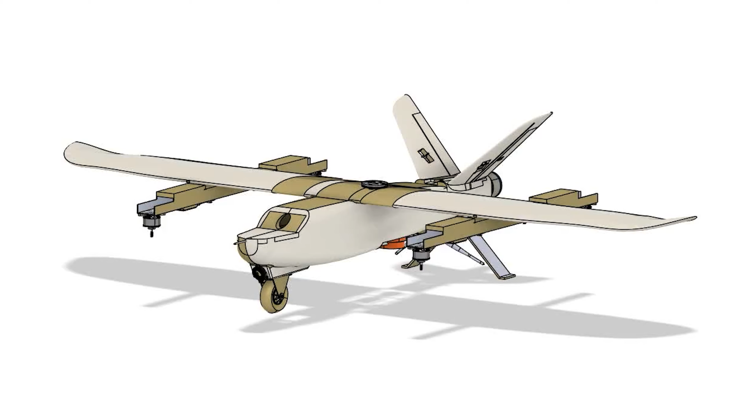The Fergani UAV is fully autonomous and has 5 motors, 4 vertical and 1 horizontal. It can perform vertical landing, takeoff, and area scanning maneuvers with its 4 vertical motors and uses its tail motor for navigation. The Talon model of the XUAV brand was used as the base of the fuselage, and modifications were made depending on the mission requirements.

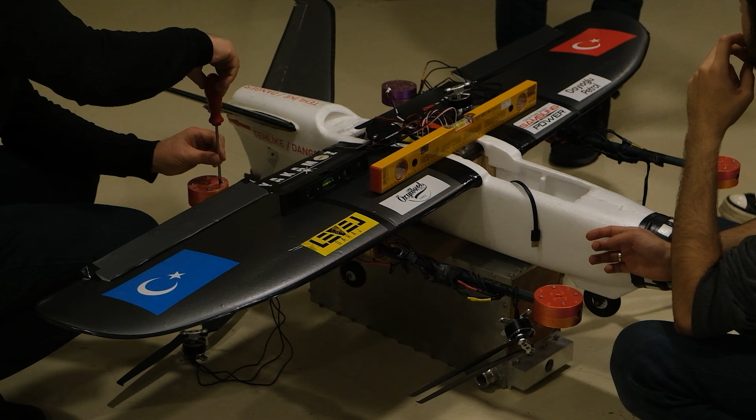Fergani, which has an average battery life of 40 minutes and a communication range of 40 kilometers, is designed to carry its payload and autonomously recognize a target, then drop its payload when it reaches the drop point. It has a 6.3 feet wingspan and a fuselage length of 3.6 feet, and it is designed for long-distance gliding.

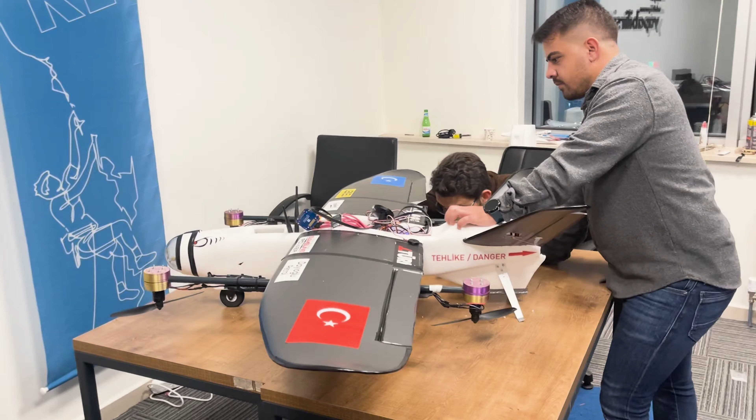The avionics systems of the Fergani UAV is designed to be compact and modular. All actuators, sensors, and control components are connected in such a way that they can be easily removed and installed, and can be quickly replaced if necessary.

A 6-cell, 22.2 volts lithium polymer battery with 22,000 mAh load capacity was chosen for the completion of the mission and to provide long flight time.

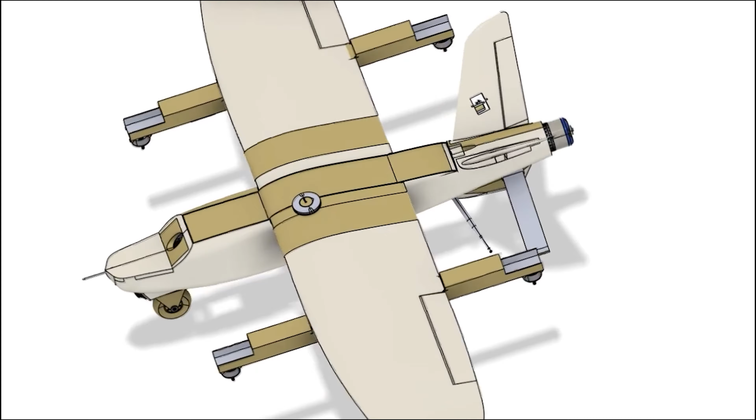SUAS V4014 motors, which are highly efficient and will provide the required thrust, were used as vertical landing and takeoff and drone mount motors, and Skywalker 80 amp was selected for the ESCs that will feed the motors.

SUAS X4130 was chosen as the tail engine for its high thrust, and Flycolor's 150 amp was chosen as the ESC. An emergency power cutoff switch is included on the top of the housing to be able to manually cut off the power if an emergency arises.

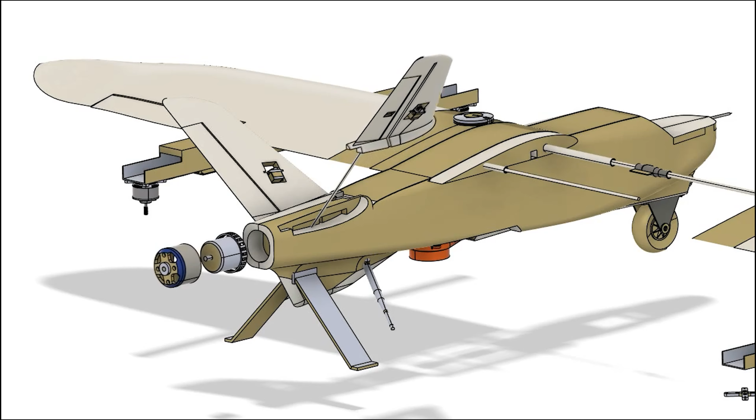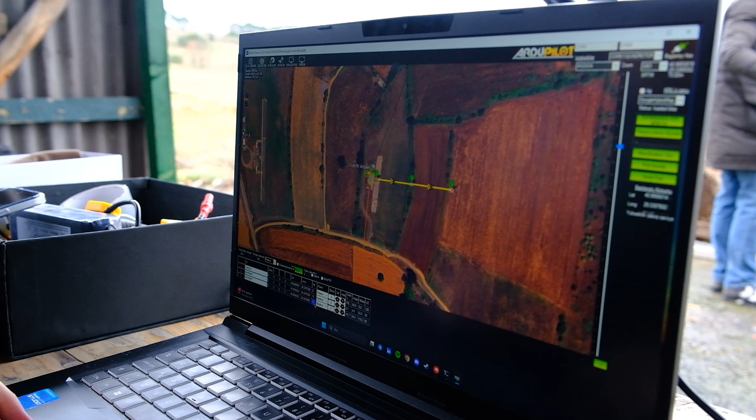The ground control station uses telemetry and Wi-Fi for communication units. The necessary mission commands will be sent to the aircraft through the ground control station with the interface software and connected communication systems. The aircraft's position, location, altitude, airspeed, and the shapes it sees are designed to be displayed on the ground control station screens.

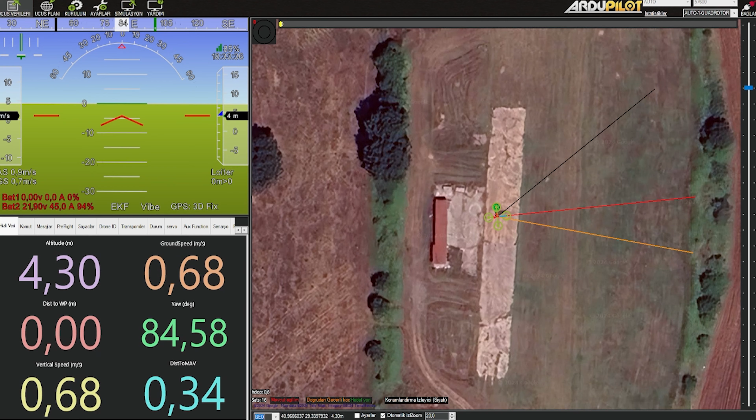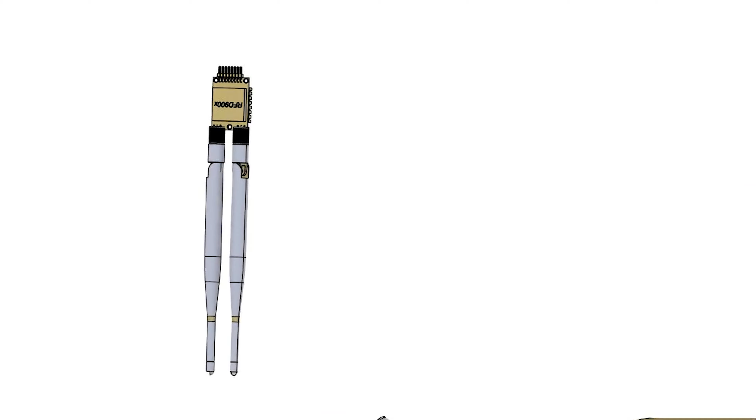Between the aircraft and the ground control station, a two-way connection must be established. This connection starts with the transfer of telemetry data and camera images produced by the aircraft to the ground control station. At the same time, the necessary commands from the ground control station to the aircraft are transmitted through this connection. The aircraft communicates with the ground control station via 3 different frequencies, in 3 different wireless ways.

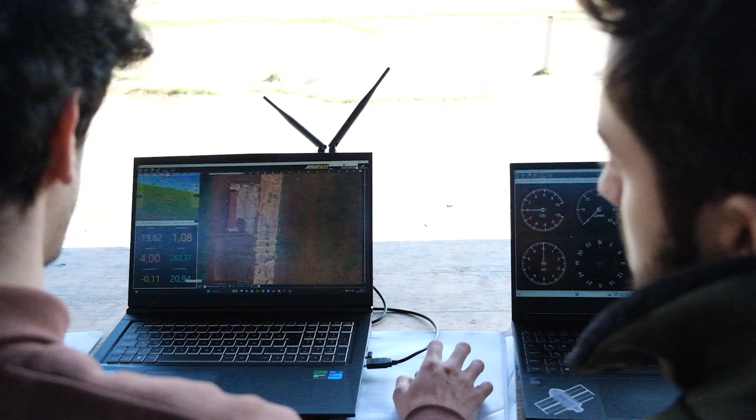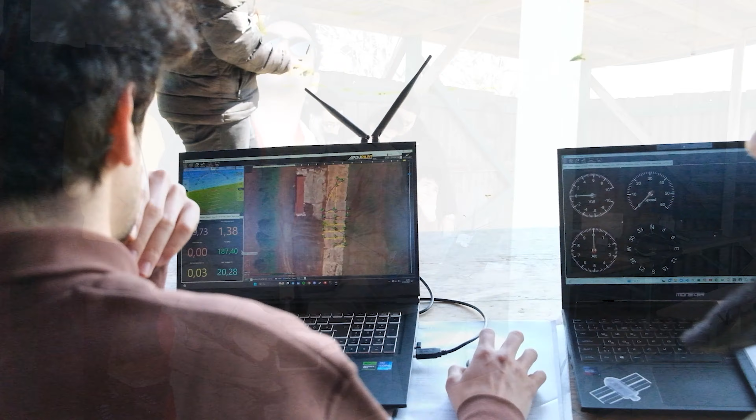The 5.8 GHz band is used for image communication and transmission. The RF 868 MHz band is used for the transmission of telemetric data, and the 2.4 GHz band is used for the safety pilot to take control of the system in case of emergency.

Within the scope of the autonomous flight mission we undertook in the competition, the Fergani VTOL UAV will take off from the runway in rotary wing mode, and after reaching the required stall speed, it will move in fixed wing mode to the area where the payloads will be dropped. After reaching the region, it will switch to drone mode, and the region will be scanned sequentially.

In line with the tests carried out, improvements made in the software were aimed to keep the aircraft in the air in the most appropriate way.

Fergani UAV is designed to carry 5 8-ounce water bottles and will release its cargo with a parachute. The release mechanism is designed as a rotary system, and only the parachute is attached to the water bottles that fit into their slots without any other mechanical parts. In this way, opening the water bottle release with the parachute is as easy as turning the lid.

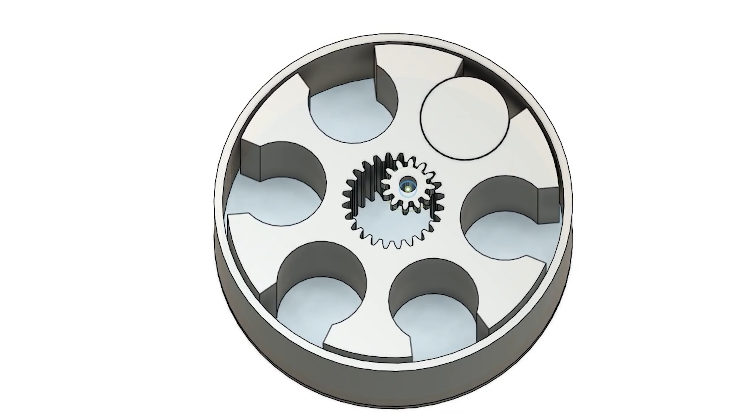For the release mechanism, the water bottles, which are placed in a round slot in the rotary part that is placed in a static body and rotated with the help of a servo motor, are designed to work by rotating them so that they correspond to a hole under the static body where a single bottle can fit. 5 water bottles are placed on a drop mechanism which is stationed at the center of gravity with a weight of approximately 2.5 pounds or 40 ounces.

These are designed to minimally affect the balance of the vehicle during flight. After takeoff, a fixed-wing flight will be performed until the drop zone, and when the area to be scanned is reached, the UAV will switch to drone mode, the terrain will be scanned, and the drop zone will be recognized with the image processing algorithm.

During the scan, if the drop zone is discovered, the UAV will switch to hover mode and drop the payload from a height of 80 feet. When the payload starts to fall, the folded parachute of the payload will open with the wind caused by the free fall, slowing the fall and dropping it as close as possible to the required area without damaging the payload.

To detect the shapes, it was decided that deep learning-based algorithms would be used because they provide clearer results. Considering these conditions, SSD, YOLO, and Faster R-CNN object detection algorithms were found in the research. The SSD algorithm is based on deep learning and uses a CNN architecture. The main feature of the SSD algorithm is that it detects and localizes the object in one go. And since it uses a single network, it takes a short time to train.

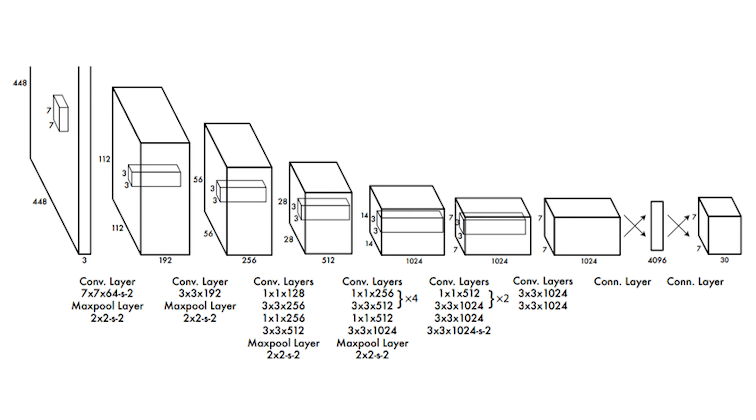Since the Faster R-CNN algorithm takes the image through long processes while identifying objects, the need for a new model has emerged. YOLO, which emerged in line with the needs, is another improved object recognition algorithm using deep learning. When the algorithms were compared, it was concluded that the YOLO algorithm and its versions provided better performance, FPS values, and accuracy values, and it was decided to continue training on YOLO.

To detect objects, a training set is needed first. It was decided to train from YouTube videos and our image recordings. The dataset consists of 4,588 as train set, 1,314 as valid set, and 655 as test set, with a total of 6,557 images, and the algorithm was first decided to be trained in the Google Colab environment.

But the graphics card provided by Google Colab was insufficient compared to the graphics card we have. As a result, training was done with the NVIDIA RTX 3080 graphics card. The trained artificial intelligence task software was made functional by using the OpenCV library.

The task of the robotic operation is to control the data received from the aircraft environmental components on the flight control computer. The computer vision algorithm written in the mission computer determines the time to drop the cargo and completes the mission by transmitting the necessary orders to the flight control computer. Controlling the aircraft's flight by effectively processing and utilizing the data received from the aircraft's environmental components is of paramount importance. This task covers a critical and challenging area, especially in the development and processing of computer vision algorithms.

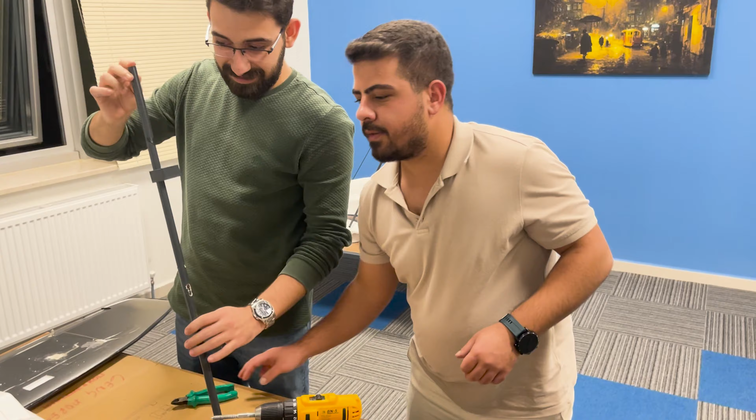To minimize the breakage risk of the aircraft, the aerodynamic flow analysis of the wings was performed using the ANSYS program, followed by the airfoil analysis of the aircraft using the XFLR5 program, and the necessary improvements were made to ensure a more durable and effective design of the wings. These analyses aimed to reduce the risk of breakage by increasing the aerodynamic efficiency of the aircraft. In this way, the safety and performance of the aircraft were significantly increased and its operational efficiency was maximized.

The Fergani UAV was designed as a VTOL drone to ensure a stable and balanced takeoff in difficult weather conditions and different terrain types, and to be able to be used as a quadcopter drone to make it easier to scan the area before dropping cargo and to drop cargo afterwards.

Motor performance and energy consumption were evaluated by observing the current draw of the motors. The energy efficiency of the aircraft was analyzed by correlating these data with the time in the air. In line with the data obtained, it is aimed to increase the performance of the aircraft by making the necessary updates.

PID control systems are used to stabilize the aircraft and ensure that it follows the desired course. In these tests, the stability and maneuverability of the aircraft were tested by adjusting the parameters of the PID controllers. In particular, the focus was on their ability to smooth out possible fluctuations during flight.

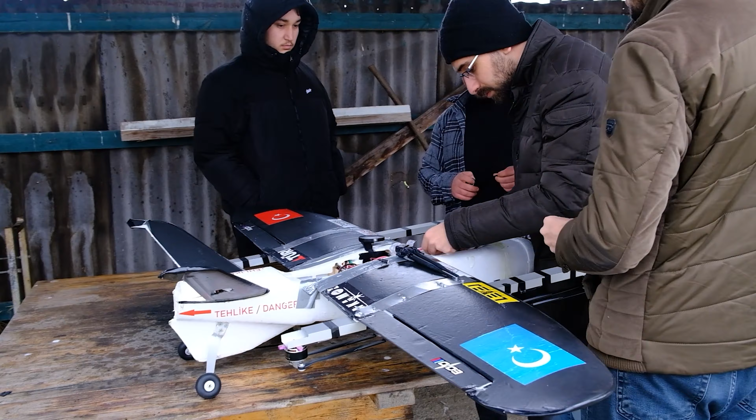In the load drop tests, the ability of the aircraft to safely drop a specific load is tested. These tests, which are essentially important for unmanned cargo aircraft, ensure the load is dropped without disturbing the balance of the aircraft and falls towards the point where it is dropped. The success of these tests increases the usability of the aircraft in the field of logistics and transportation. Successful completion of these tests aims to improve the reliability and performance of the aircraft, leading to better results in future flights.